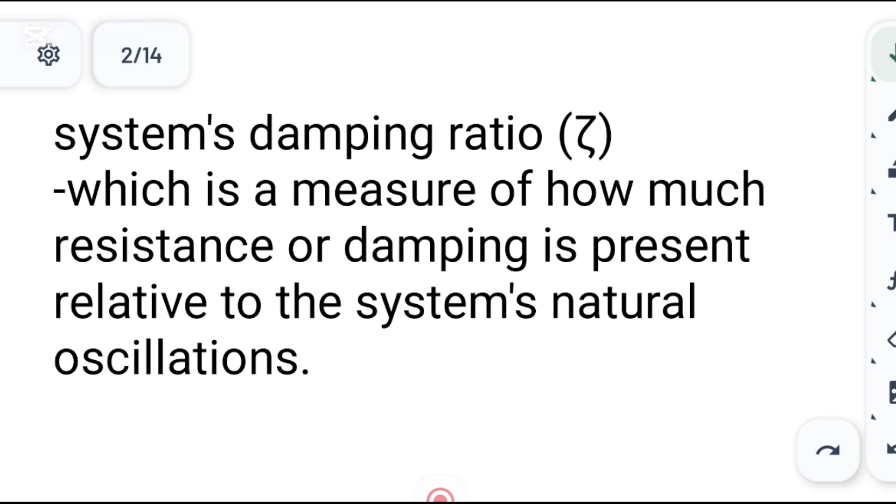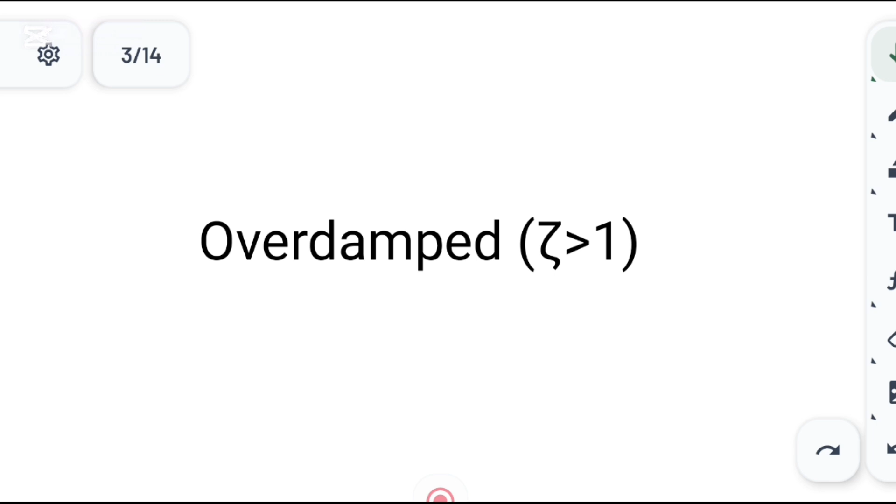Now, we will be discussing the overdamped, the first type of damping motion, which has a system's damping ratio always greater than 1. Again, zeta represents the system's damping ratio: how much resistance or friction is being applied to the system's natural oscillation. That is always greater than 1.

We can define this relationship as the system has more damping than needed to prevent the oscillation. It has more resistance than needed to prevent oscillations, therefore there will be no oscillation in this type. The damping force, the friction, the resistance, dominates the natural oscillation of the system.

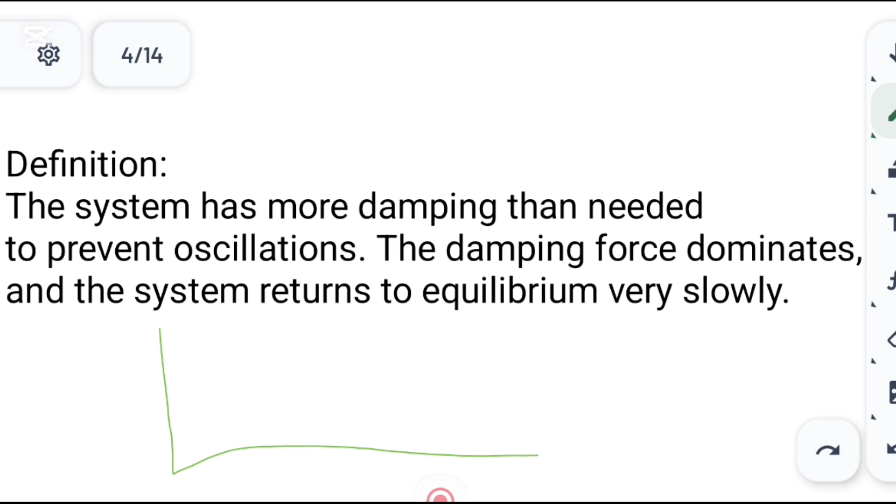To better understand this, I have here a graph. The vertical axis represents the amplitude, the horizontal represents the time. We can draw the graph of an oscillating body in overdamped like this. The system has more damping than needed, and there are no oscillations. If there is no oscillation, the wave won't be repeated.

I'd like to draw it properly like this. It won't be repeated; it just reaches equilibrium, which is the horizontal line here. If there is an oscillation, there will be a repeated pattern like that. But in an overdamped system, there is no repetition of the wave because there is no oscillation. I'd like to emphasize that.

An example of this is a door that has an excessively strong damper that slows its motion significantly. After being pushed open, the door slowly and smoothly closes without bouncing back. If the door is not bouncing back, there are no oscillations, but it takes a long time to reach the closed position.

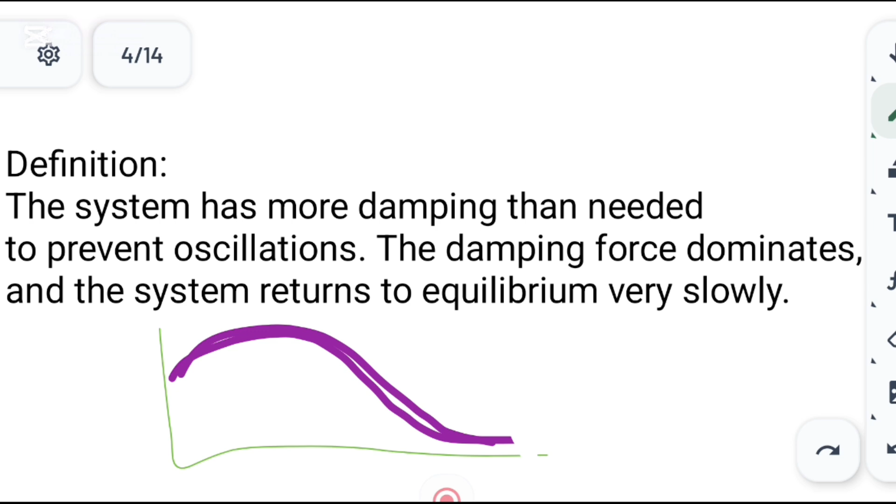Next we have the underdamped. In underdamped oscillation, the system's damping ratio is less than 1. We define this relationship as the system has insufficient damping.

We will exhibit the graph of an underdamped system like this. To better understand, let us analyze this graph. We have the vertical axis to denote the amplitude of the wave and then the time. If you have a door with less resistance on the damper, or the hydraulic damper, it will swing like this.

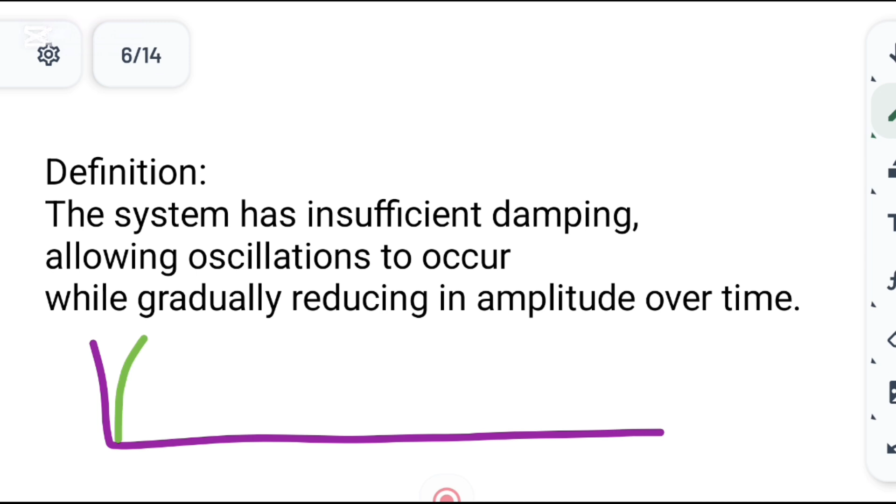Right. The amplitude decreases, or the height of the wave decreases, but the oscillation is being repeated over and over again. In this type, the system oscillates around the equilibrium point with decreasing amplitude. Ay nakikita naman natin, pag may oscillation, yung damped motion, paulit-ulit na nagsiswing yung door. So, an example of this is a poorly adjusted spring-loaded door that bounces back and forth before it finally stops.

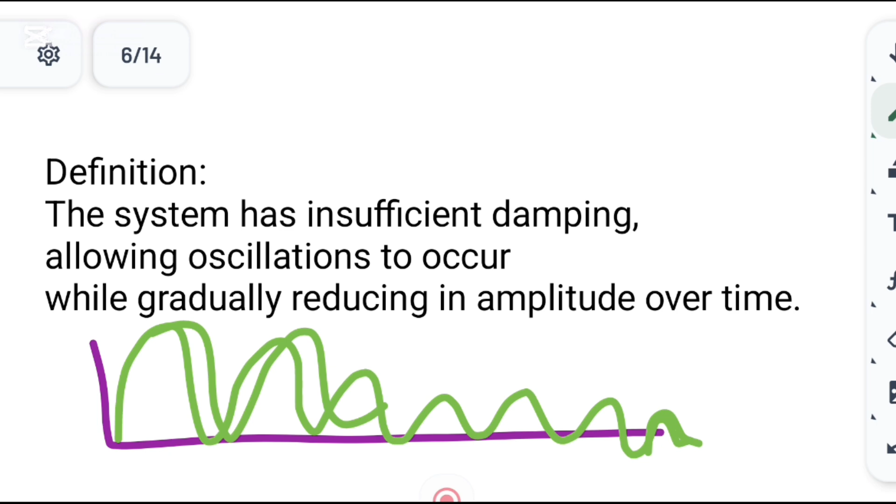It is because the door has insufficient damping or resistance, allowing it to oscillate before settling. After being pushed open, the door swings back and forth a few times, which means it oscillates around the closed position before eventually settling and staying closed. That is what we mean by this. And then the next one would be the critically damped oscillation.

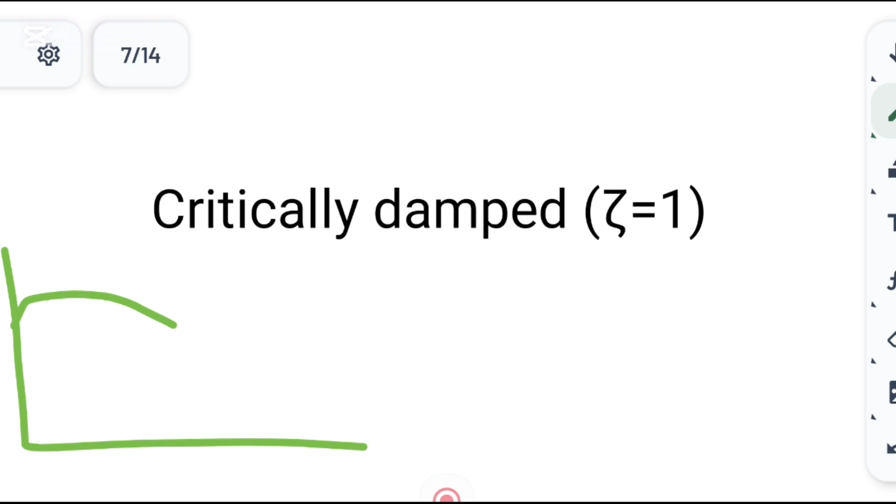In critically damped oscillation, the system's damping ratio is equal to 1, meaning it has a balance between the system and the resistance. So in this case, there are no oscillations, like the overdamped. In overdamped, there is no oscillation. In critically damped, there is also no oscillation. Let me draw and compare the graph of amplitude versus time representing the overdamped and critically damped. This is the overdamped, and this is the critically damped. It's like that.

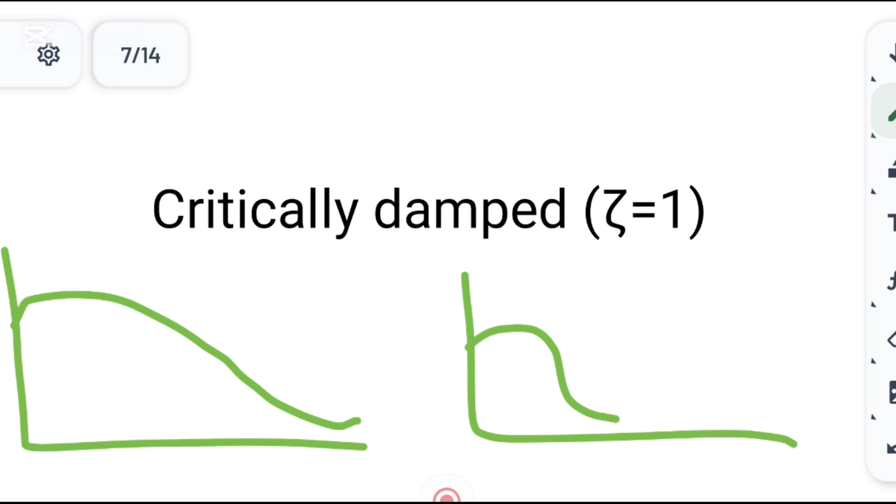In critically damped oscillation, the system has just enough damping to prevent oscillation while returning to equilibrium as quickly as possible. There are no oscillations. The system reaches equilibrium in the shortest possible time without overshooting, without bouncing back and forth, without slowly closing. Let me have the example of the elevator. The door has just the right amount of damping to return quickly to the closed position without oscillating.

Yung elevator ba, pag nag-close, bumukas ulit on the same floor? No, right? It has only one direction, and if it has only one direction, it has no oscillation. And it closes quickly. May mga doors din na ganyan, sasara agad. A well-calibrated hydraulic door closer closes the door efficiently and silently. The door has just the right amount of damping to return quickly to the closed position without oscillating.

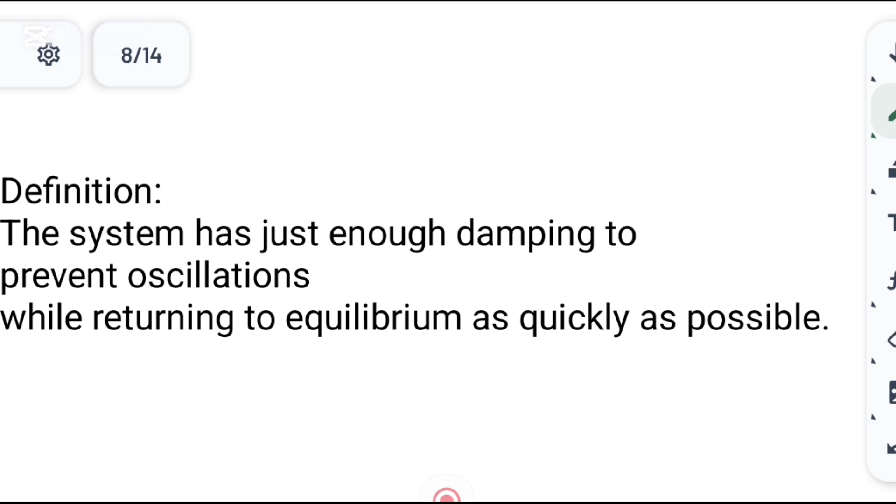After being pushed open, the door moves smoothly and quickly to the closed position without bouncing or taking too long. The best example of that is the sliding door or the elevator, or good doors in your home. Now, to summarize these three types of damped oscillation, the overdamped is a slow, smooth return to equilibrium.

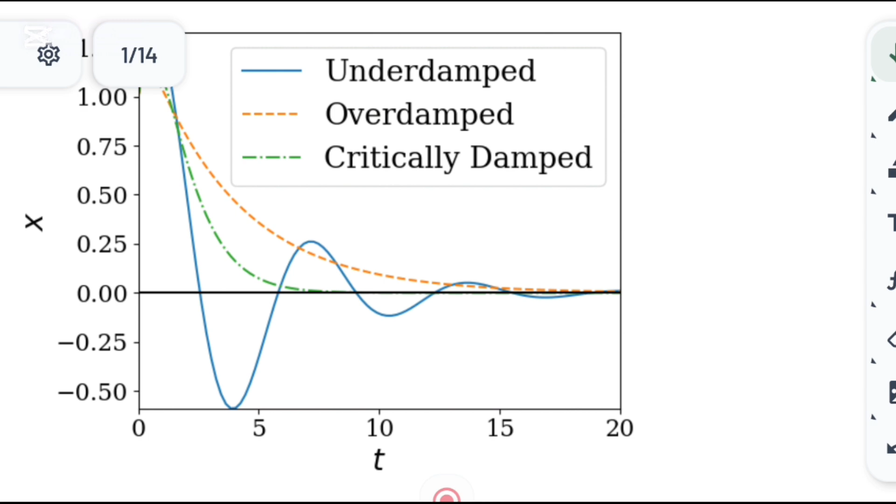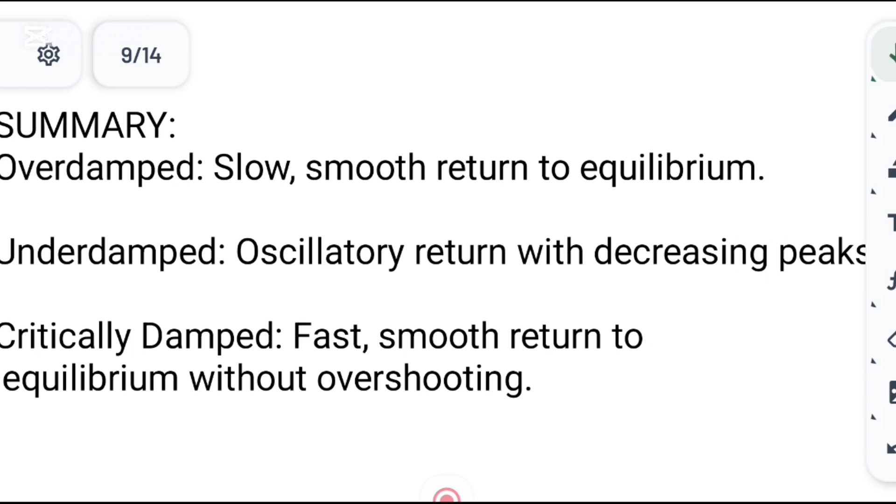To better understand this, let me have another example. An example of overdamped is the car suspension. Imagine a car suspension that is overly stiff. After hitting a bump, the car slowly returns to its normal position without bouncing. Pero may mga car na nag-bounce pa paulit-ulit. So anong type yon? Underdamped, kasi hindi niya nare-resist yung oscillation.

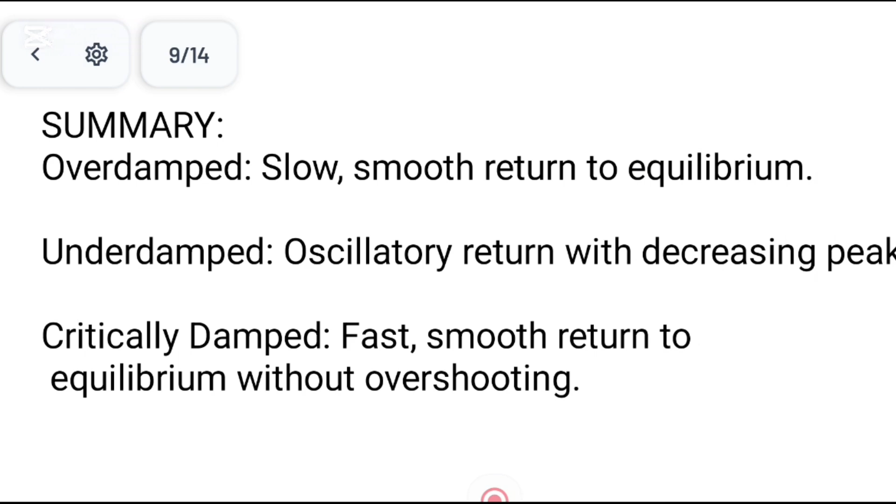So the answer for this one is letter B. Decrease the damping force slightly. Why? An overdamped door closes very slowly because the damping force is too strong. To make the door critically damped, the damping force needs to be slightly reduced so the system can return to equilibrium more quickly without oscillating. Increasing the damping force or the resistance force would make it more overdamped, while removing the damper or adding a spring would destabilize the system.